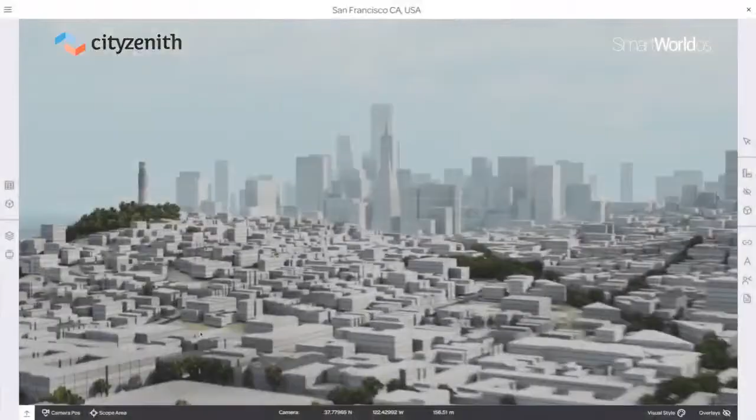They empower us to see, analyze, and predict trends and events in cities using data like never before. Here at Cityzenith, our Smart World OS urban digital twin platform is purpose-built for the people who design, build, and run large projects in cities. Property owners, facilities managers, infrastructure operators, energy firms, city planners, and governments leverage Smart World's data and analytics to design and develop their projects far more efficiently and for less money than other tools allow. A recent report from ABI Research revealed that urban digital twins will save cities a whopping $280 billion in planning, development, and operating costs over the next few years.

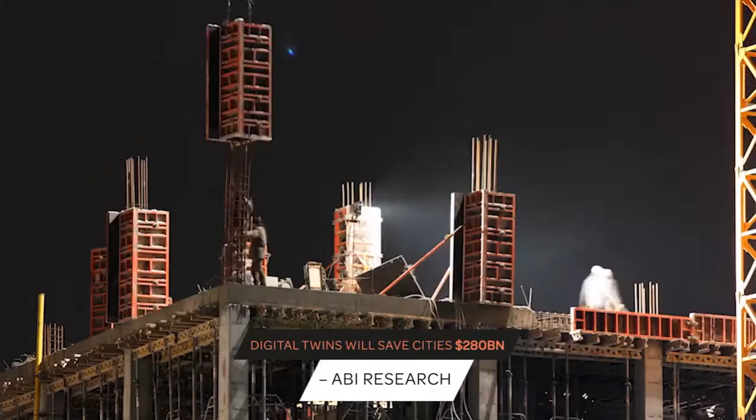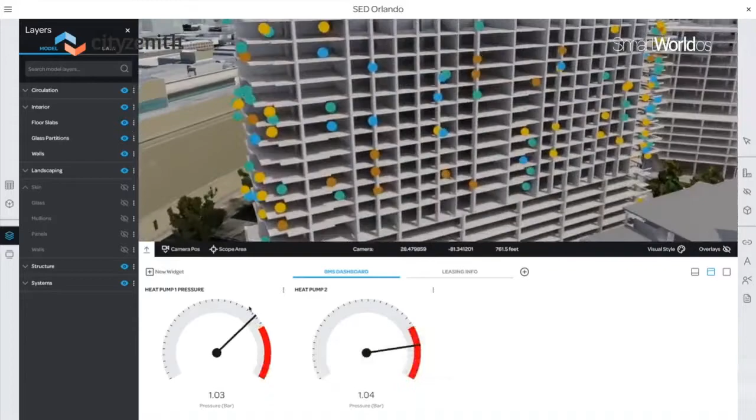Smart World OS consolidates data from a multitude of stakeholders in a single, easy-to-use, interactive 3D platform. No platform in the market can do what ours does today. Our users report dramatic results: operating costs cut by 35%, productivity improved by 20%, emissions reduced by 50 to 100%. We've created digital twins for airports, seaports, rail infrastructure, mixed-use building projects, and even entire cities all over the world.

So that was a high-level overview of urban digital twins themselves. You've heard the ABI Research results suggesting that operating costs can be reduced by as much as 35% inside of major infrastructure and physical building assets, productivity gains from work order management, maintenance, and even cutting emissions - something of terrific interest to us - by 50 to 100% by leveraging digital twins.

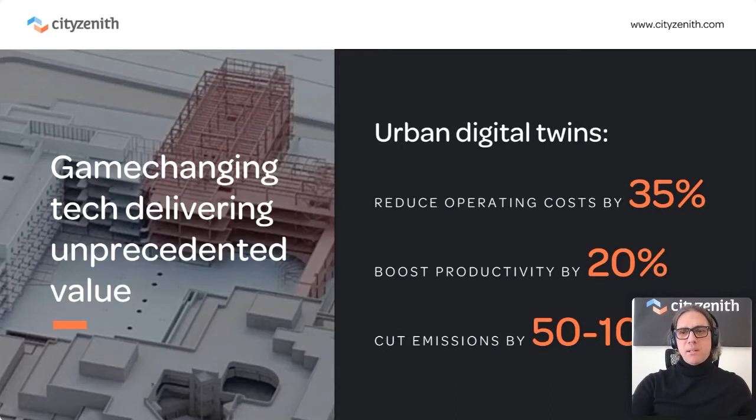As a worldwide trend, Forbes predicted that by the year 2026, 500 major cities around the world will be leveraging digital twins for daily operations. In terms of numbers and market size, ABI Research has revealed that the technology is projected to save $280 billion in city planning, development, and operating costs when deployed across cities.

And the technology sales and services, product and services market for the last couple of years started off about 1 point something billion, was 3 billion the year before, and is projected to grow to almost 50 billion over the next few years. So substantial growth of 58% or more year-on-year compounded annual growth, which is amazing for any industry.

Now, there are different types of digital twins. You might have read about digital twins that focus on manufacturing or on oil and gas, even on other sectors. We focus on the building sector, and there's a couple of reasons for that.

Buildings produce 50 to 70% of all emissions in cities. They are massively inefficient. 30 to 39% of total emissions globally come from buildings, and about three-quarters of all buildings in the United States need to be retrofit to achieve net zero goals.

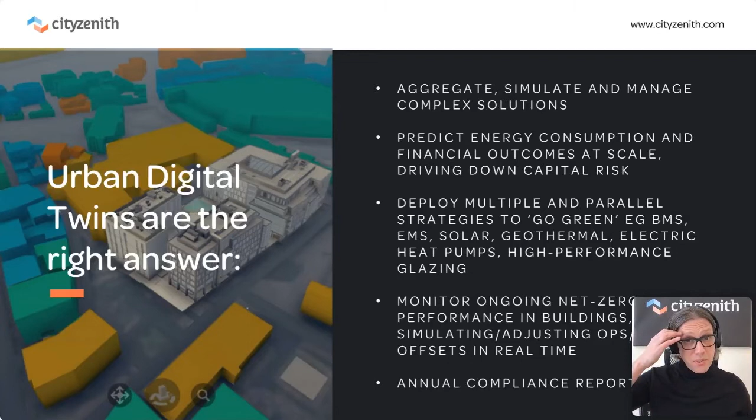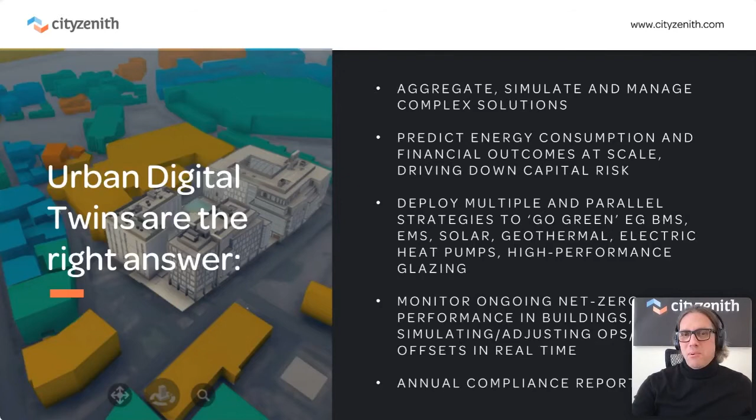What we do is deploy multiple parallel strategies in our digital twins to tell the building owners: you should go with this energy management system, this renewable structure, and this source for your carbon offsets, and that will get you to net zero. Then we'll monitor that and continuously re-simulate, adjust, and recertify every year so you can maintain compliance with those offsets. That's the beautiful part, and I'll get to some interesting partners we have in this space coming up. This allows us to monitor the ongoing performance of net zero buildings and simulate everything I just mentioned, for everything from dropping operating costs to annual compliance reporting, which is essential for maintaining actual net zero status.

We've worked with property owners, facilities managers, infrastructure operators, energy firms, architects, engineers, planners, and governments all over the world over the course of the last several years, executing about 15 sizable large-scale urban digital twin projects across 3 different versions of the software, the most recent called Smart World OS. We've done large projects: airports, seaports, infrastructure projects, mixed-use commercial developments, large master developments, universities, real estate portfolios, some work with utilities here in Chicago, smart districts, and even entire cities.

What we've learned is how to evolve this product over the course of maturing with these major digital twin projects, about what makes us special. We are the most advanced digital twin product in the building industry. There are others out there, but in this industry, we believe we're the most advanced. We're definitely the most flexible and most scalable as well, which is why we tend to get chosen for large projects, because we can sit in between a lot of other large players and make everything work together. We work across the entire life cycle, from operational to compliance management.

We have this emerging twin app community, applications that plug into Smart World, just like apps here, a little visual that plugs into your smartphone and does different things. We have apps that do the same thing in Smart World, but rather than getting you some news or some music, you'll be able to run simulations on housing cost scenarios, look at things like optimized traffic flow, or just get data visualized, etc.

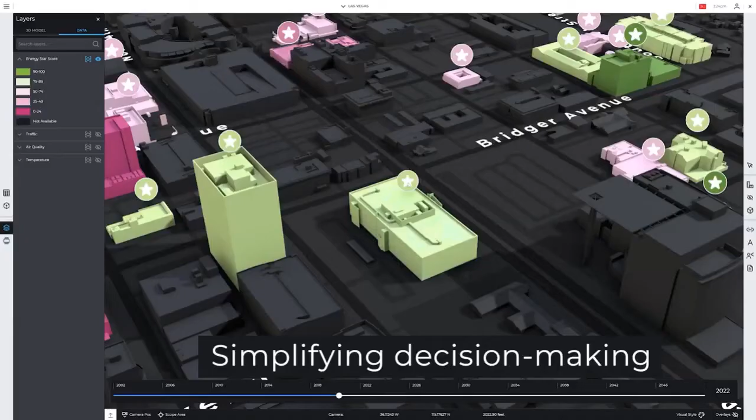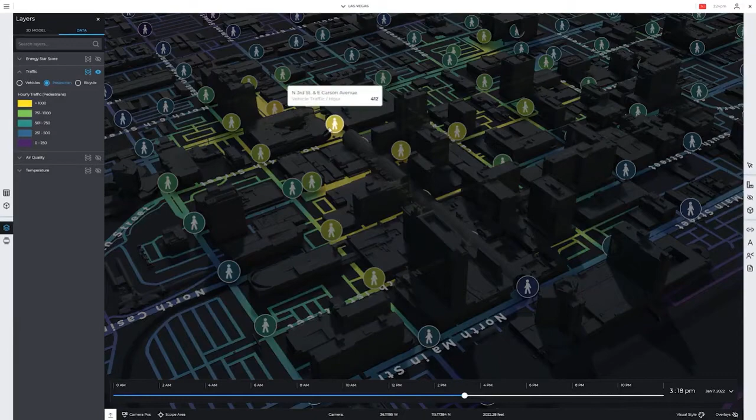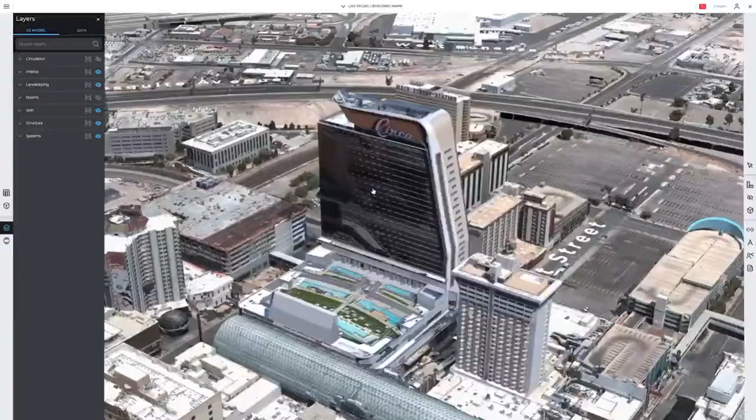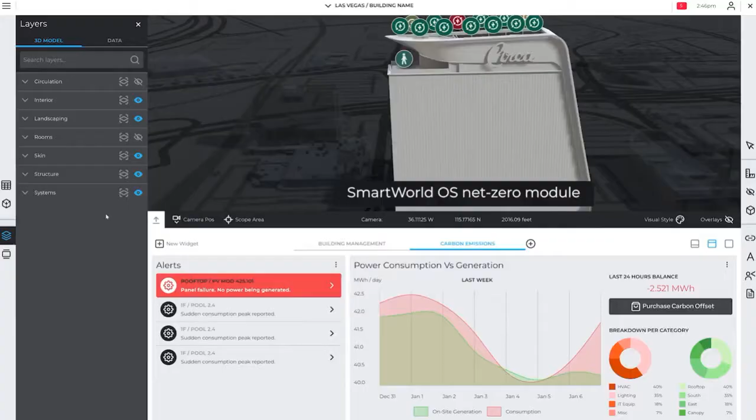39% of global carbon emissions come from the buildings in our cities. Currently, less than 2% of America's 6 million office buildings are green. What if we could help buildings, infrastructure, and cities reach net zero faster, without risk, and at a fraction of the cost? At Cityzenith, that's what we do. Our Smart World platform leverages cutting-edge AI to automate the complex decarbonization process. Powerful 3D visualization tools help clients analyze and predict performance in real time, simplifying financial and operational decision-making. Thanks to our partnership with the City of Las Vegas, our Las Vegas Digital Twin features an unprecedented level of real-time sustainability data. Outside buildings, sensors monitor complex metrics, feeding data continuously into Smart World, including information about traffic density and air quality, helping planners, developers, and city officials make Las Vegas a more efficient, sustainable, and enjoyable city. Inside buildings, Smart World OS allows users to optimize their operational and energy systems, ensuring occupants enjoy a high-quality environment. Cityzenith's new Smart World OS Net Zero module continuously monitors clients' energy consumption, tenant behavior, and renewables performance, making it simple to purchase high-quality, verified carbon offsets to ensure properties maintain net zero compliance, providing the only true end-to-end net zero solution for building owners today. Cityzenith. We pledge to make the built environment a cleaner, safer, more efficient place for all. Join us.

Okay, very good. Thank you for tolerating that lovely video, which we're very proud of, and we recently showed at the Consumer Electronics Show in Las Vegas. Wonderful opportunity that we had.

So some of our completed projects that I referenced earlier include something for Cushman and Wakefield in New York that we did with the Grand Hyatt, which was one of our earlier exercises in consolidating different building systems into a single interface. We then worked with W.S. Atkins, Laing O'Rourke, and Network Rail on a very impressive high-speed rail project that ran from Oxford to Cambridge called the East-West Rail Project. They were using a digital twin to aggregate massive amounts of project site data to make it as easy as possible for engineers to design with real-time information. It was fabulous. We were also able to update, for the first time—this was a few years ago—3D BIM models in the software so engineers could really work in real time inside Smart World.

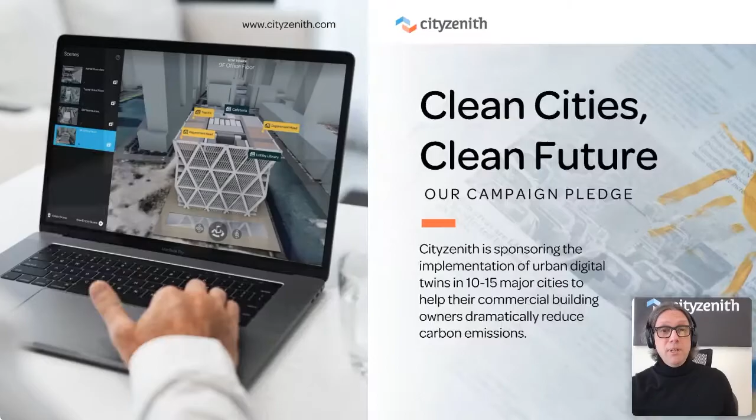I mentioned several times this campaign, called Clean Cities, Clean Future. We've announced several cities - I believe New York, then subsequently Las Vegas. We have not formally announced Phoenix in a big way, but did in a less formal way, with a bigger announcement expected later this quarter. We also now signed Los Angeles, which will become an announcement soon as well.

So let me walk you through some of the videos, or actually it became a television commercial that we created to support this campaign, which we put out on airwaves around the United States. It was run on CNN and MSNBC, everywhere, for about 3 months.

In just a few decades, 68% of us will be living in cities. But did you know that cities account for 3/4 of all global CO2 emissions, and population growth and poor planning is making the problem worse? With our transformational AI software platform, we pledge to try and make the world's most polluted cities more sustainable, clean, and efficient, because we want to build a better future for our children, and we want you to join us.

So the campaign seeks to do this in about 10 or 15 cities, and we got mentioned over 1,000 times across international media - in Cities Today, on CNBC, and Forbes, in Informed Infrastructure and MSNBC. It was just a massive success.